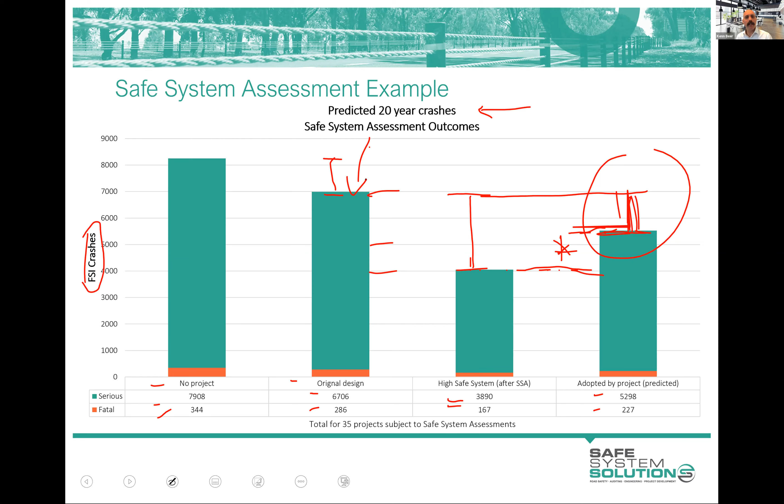I mean, the fact that these safe system assessments will feed back to the designers. So they will get a safe system assessment, they will review it, they'll update their design. The next design they do, they'll be like, oh yeah, that safe system assessment said that. Maybe I do that from the start. So I'm hoping we're going to see this coming down over time. So there are a couple of interesting ones. The other one I found fascinating was this one.

And we're doing a safe system assessment. We have an aspiration of zero deaths and serious injuries. Yet even after our safe system assessment, these ideas go forward, we've still got this massive residual crash problem, don't we? And this is interesting. I sort of questioned it a bit when I read this, or the report was tabled. I was like, oh.

But when you delve into it, the crash prediction models are pretty good in the sense that they take into account all of humans being human, and a lot of what we're seeing in this area down here are the motorcycles. So yeah, a fairly vulnerable road user going at high speed still. We see the extreme driver behaviours. We talked in module 1 about them not being the dominant cause of road trauma, but they're still a pretty significant part, and they're highly represented in this.

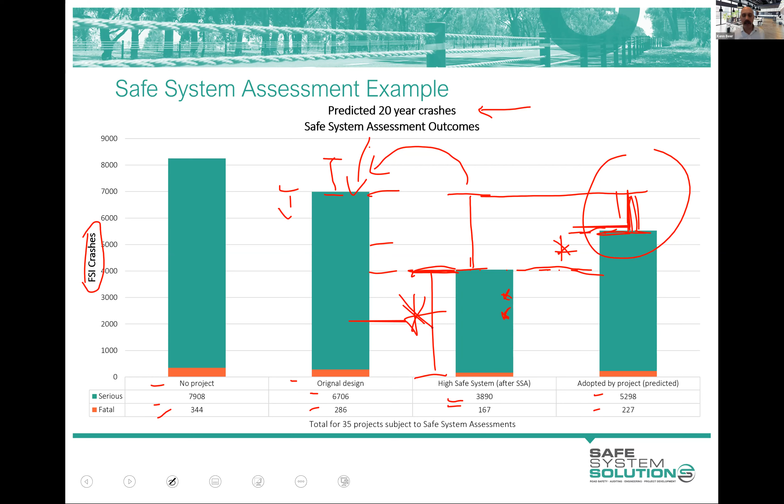What they're really saying is, things that align highly with safe system principles. But it just got us in these funny debates, and we had no way of measuring and making that commentary until the safe system assessment framework was tabled, and now you can quantify and score, and we can get some actual measurable decisions around that. Before that, it was just people's opinion on what was in their mind safe system or not, and I think that caused a lot of trouble.

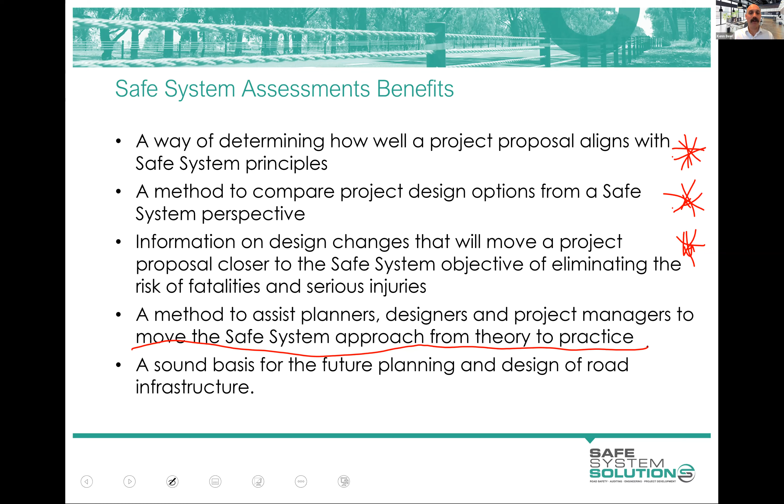Max, anything for me? Still kicking along quite well. Thank you, Kenn. Very good.

Very good. Let's talk through the process. This is the general process of a safe system assessment within an infrastructure project, okay? So the first thing to note is that the best time to do a safe system assessment is early in the project. The concepts, the planning, the drafts, the different ideas. Once there are detailed designs, even functional designs, it's actually better to do a road safety audit, in my experience.

Safe system assessment's okay, and it works well, but there is just more major change likely to be put forward in a safe system assessment than there is in a road safety audit. I mean, road safety auditors, and some of you are road safety auditors, you've done the course with me. We teach that you're not there to fundamentally question the project, the way they're doing something. You're there to just identify safety concerns associated with it. The safe system assessment is just more aligned with really questioning the intersection form, the operating speeds and these sort of things. There's overlap. I mean, audits do a bit of that.

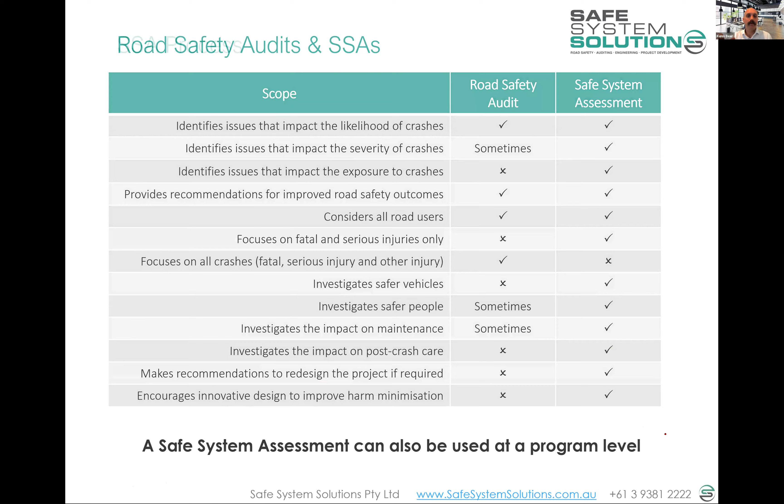So let's talk through the sort of steps that you'll be going through as safe system assessors, or if you're running a project and you're getting safe system assessments done. The first thing is that whoever's managing the project and the designer are going to decide, first of all, is a safe system assessment going to be part of our project? And if so, what sort of assessment is it going to be? Is it going to be a full safe system assessment, or is it going to be something more rapid? And I will define both of those terms for you shortly.

Okay, so the client, project manager, or somebody is making this decision. Often they're driven by what their state policies, their jurisdictional policies, or their local government policies tell them they have to do or don't have to do. But there's a decision made. And then they go and select a safe system assessment team. And hopefully they look to one of you, or they go to different registers that are starting to appear of safe system assessors. They make sure they know what they're doing, that they're qualified, they've done the course, and they then engage them to do the safe system assessment.

Then there's some sort of exchange of information, right? It could be a commencement meeting, it could be a variety of phone calls and emails, collecting the information that the team needs, and really drilling in and understanding the context of the project. We talked about movement and place and the like, getting an understanding of that. What are the projections on traffic volumes and pedestrian and cyclist numbers and all of that sort of information. So gathering lots of intel.

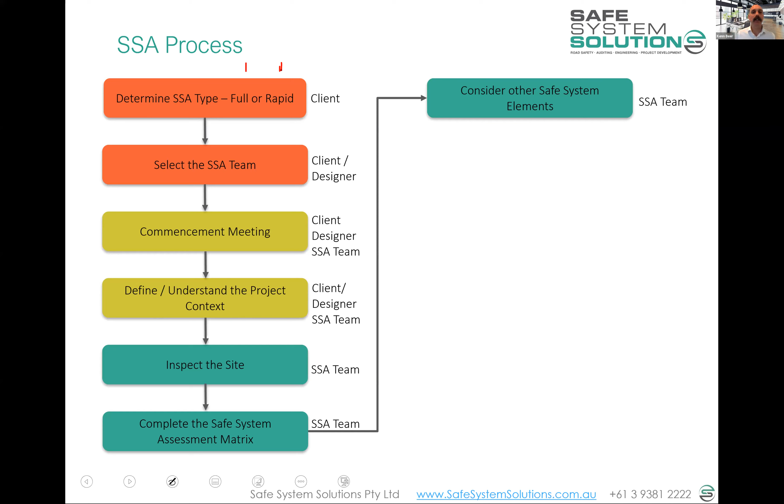Treatments to improve safe system alignment are then thought about. What can we do better in this project? What can be altered? What can be changed? And it's reported. And then it's sent off to the client, who gets it and then is going to respond to those ideas.

Not necessarily responding to the safe system assessment team, but they should, in their own project process, be saying, yep, we can do that one, we can do that one. We can't do that one because that would add $16 million to the project and we're over budget already. But instead of that, we'll do these other three. So they've got a nice, clean, documented process. And then they go and amend the design based on what they've agreed that they will do.

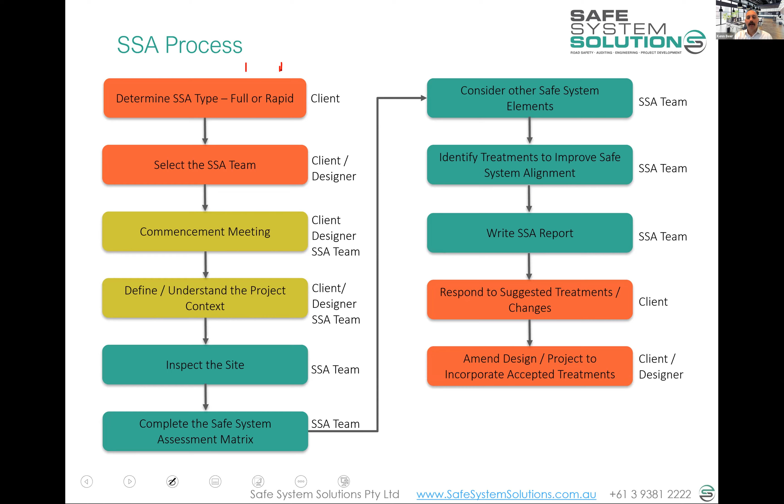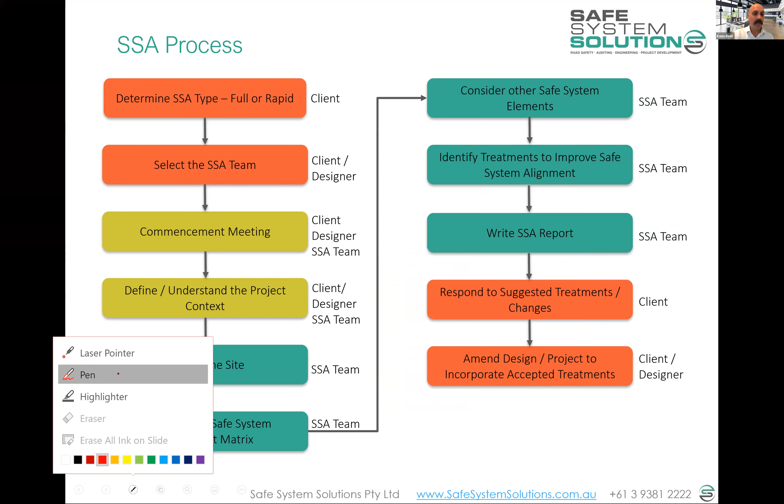And why do they do that? Well, what they're doing there is they are showing that they have followed this process, because maybe their existing conditions will be a score of 200, their design had a score of 180, and then they want to be able to add this next column, which says, well, we got a safe system assessment done and we've taken those on and it's brought the score down to 100 or something like that, right?

And that is wonderful documentation to leaders, corporate executives, project directors and everybody like that, that you've gone, hey, it wasn't bad, we were going to improve road safety, but we're committed to the safe system. We've all signed up to that, and we've done this assessment, and we've managed to bring it all the way down to here. We would love to see this go down to 0, but there's going to be challenges to get that. But it tells a story to anybody viewing it that you've done the best you can to progress this project forward with safe system alignment.

Max, questions? We did have one, which I'm happy for you to expand on, Ken, if you'd like. Just the reason there's a reluctance perhaps to get involved with SSAs, and I just mentioned that perhaps it's just not well known as a methodology in general, and practitioners aren't familiar with its application or when you should use it, or really what's the point of it, what's its output. So that's probably one aspect. Did you have any other things you could add in that space, Ken?

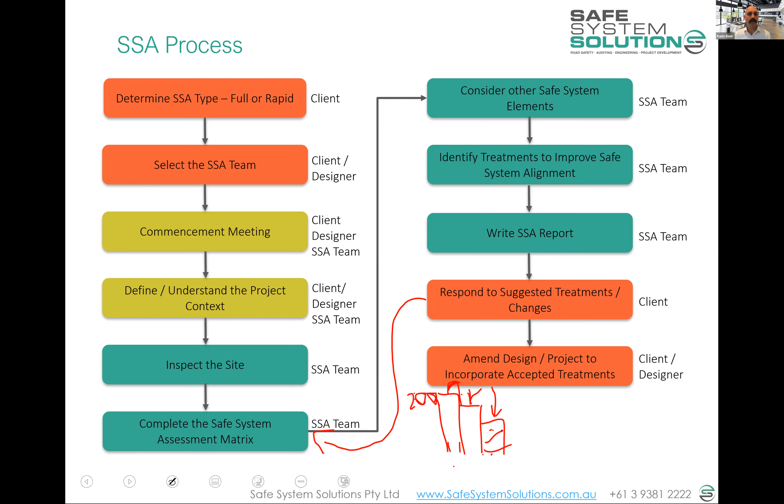Okay, I'll keep going. I'll show you a little bit of that stuff I was talking about with what jurisdictions are doing, and I'll start with Victoria here. Victoria was the earliest to adopt safe system assessment. Myself and a few colleagues did the first ever safe system assessment in 2013. Before that, we were calling them safe system audits, but we didn't want to confuse people with a road safety audit. Anyway, Victoria really took it on and had done a whole lot of things, and Austroads has then taken it on at a later stage. But Victoria has their own set of guidelines and lots of templates available. And you're now getting familiar with one of those templates, and you should use it.

Victoria is one of 2 jurisdictions to publish a register or a list of safe system assessors that they, I suppose, recommend. That's the word they've decided to use. They're dancing around different words like qualified or accredited or the like. They call them recommended safe system assessors. And this is here. They want to grow the list, an army of safe system assessors out there, but currently it's a smaller list. You contact the team. You can do that at any point. You do this course,

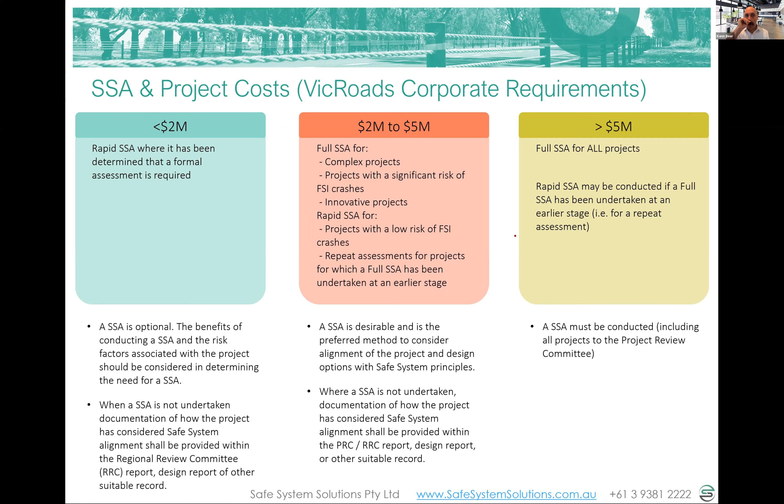So let's just very briefly look at the difference between this full and this rapid, or if you're in Queensland, you might hear the term lite instead of rapid. They're very similar processes. It's all pretty much the same except for a few elements. The full safe system assessment has a commencement meeting to get all the context of the project, as we talked about. There's this workshop. Now that's in there as optional, but that's one thing in a rapid that usually drops off. The site inspection can also drop off with the rapid sometimes. Now, I still encourage the site inspection even in a rapid, but it's one that can be dropped off. The matrix is done for the existing conditions and all the options in both.

The other elements of the safe system, those qualitative questions, that's another one that drops off with the rapid. So it's just solely down to the matrix and recommendations, changes to improve road safety. The reporting obviously is a little bit less for a rapid, and then the project considers it, makes changes, and amends it. So really, those are the four that could drop off in a rapid. So we're not talking about a lite being 10% of the effort. It's still about 75% of the effort anyway, but it's just a bit quicker to do.

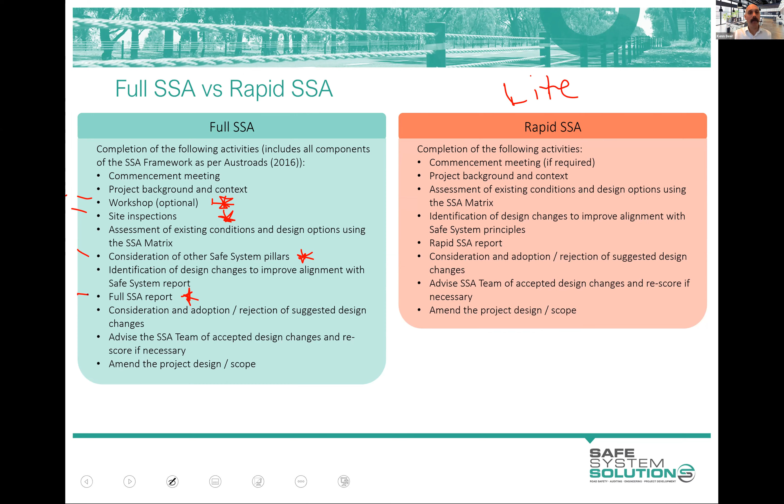And then what we're going to do to finalise and finish off today's session is to just run through a series of road environments, have a brief discussion about how well they align with safe system principles, what can be done to make them better align with safe system principles, and what you think about.

The reason we want to do that is that every individual in this group has one particular road environment that they're doing this safe system assessment on. It could be a local road environment, could be an arterial, but we want you to be able to do a safe system assessment on any part of the road network. And so when you go out of this, we want you to have at least had some thinking around a whole lot of different road stereotypes and road environments, just so you get a little feel for that. So anyway, that's what we'll do after we have a little break.

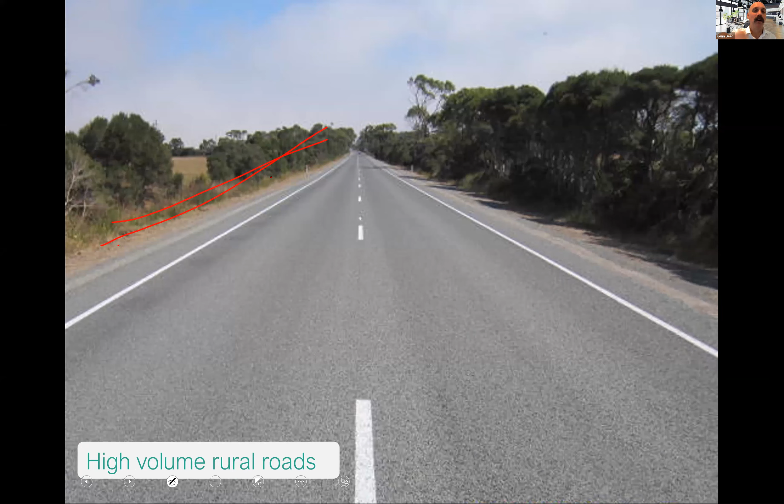Where you do get these higher order roads, and although this doesn't look like it's got high volume, it's higher volume, we really will then start to see continuous 2+1, 1+1 style barrier systems down the middle, barrier systems out there, and it'll be that bumper bowling of roads where we know people can leave their lane and be captured by a barrier system. There's significant cost involved in this, but it's creating those environments we know are safer, which will allow for the high speed traffic without having to trade off the lives and the health of our community in order for that to happen.

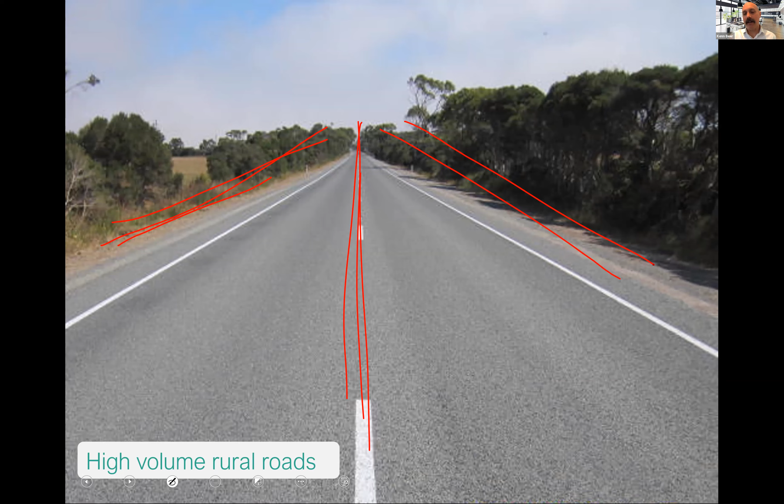The intersections on those sorts of roads provide wonderful opportunities then to get better safe system alignment, so a roundabout or something there. And if you do have your central barrier system, it provides you a good opportunity to collect access points and the like, so they can come down, turn around that, and go back that way, rather than having to have a gap in your barrier every few meters, which you can't do for minimum lengths of barrier systems and those sorts of things, of course. So

strategically thinking about how you run a route like that is good, and certainly we can share with you some reports that we've done on strategic rollout of safe system alignment in a sort of 20, 30, 50-year projection on a road, and where it's best to target different things in a coordinated strategic effort rather than just doing these little points of bits and pieces here and there.

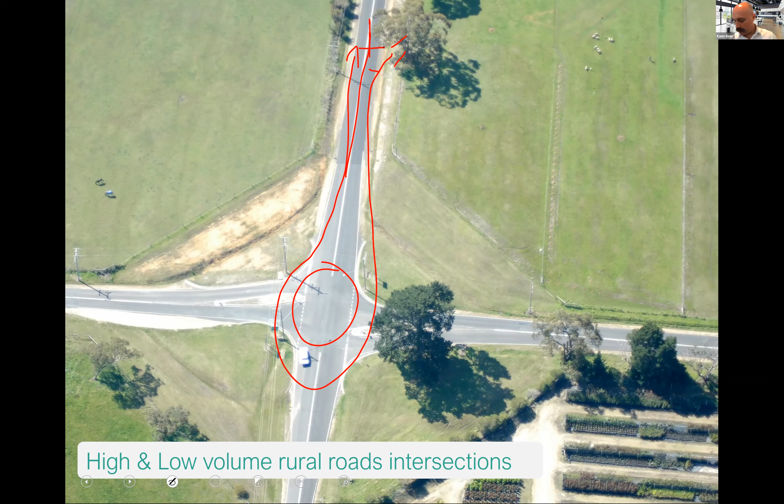How are we going on time? Okay.

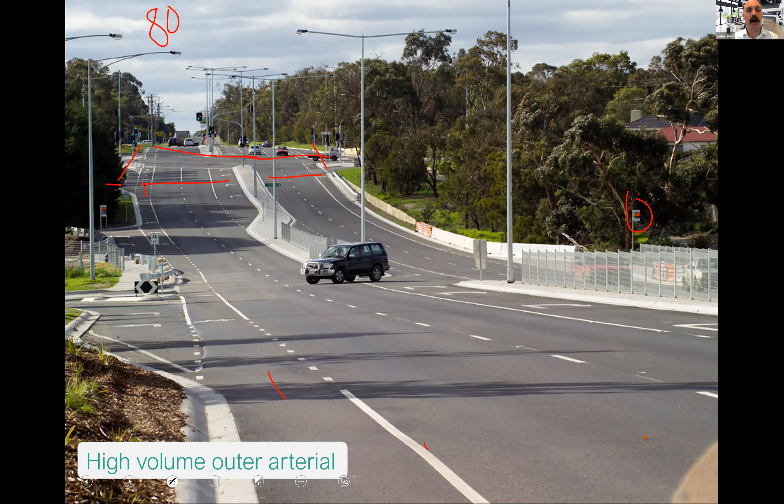And again, though, these are probably the environments where we recognise it's not trying to be a place. So things like the pedestrian fencing or real barriers, and maybe fencing off more and more to stop the pedestrians crossing through there, and specific crossing points. So those are the kind of things. It's not going to be a wonderfully beautiful road environment from a place perspective. Potentially there could be some beautification done of these areas in one way or another, with good thoughtful thinking around ensuring any landscaping and those sorts of things considers road safety. But if you're going down that track, it's really going to be almost an urban motorway, more and more of that feel.

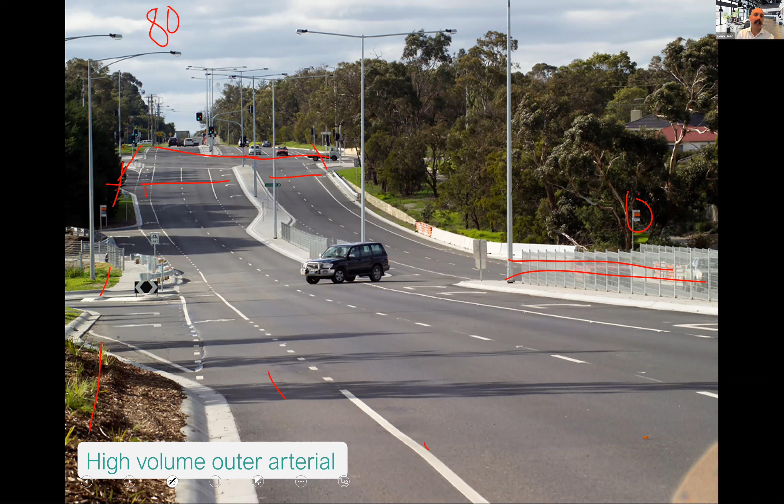And let's talk about urban motorways and the like, and their alignment with safe system principles. We see that actually these roads perform pretty well in terms of their safe system alignment, due to the fact that the likelihood is low because of the very high standard of roadway. The severity is quite low due to the fact that they've weeded out a lot of the bad safe system energy points, like any at-grade intersections. So we get that increased alignment there with acceleration lanes and conflict points at a low delta V.

Also, elimination of the exposure of vulnerable road users. So, usually banning of cyclists in a lot of jurisdictions, and pedestrians. We do, unfortunately, though, see a decent amount of pedestrian trauma on motorways and the like, due to broken down vehicles or people getting out of taxis at 2 in the morning, and wandering around on the road and those sorts of things.

So the real points for us to work through for higher safe system alignment, one of them is when the freeway starts to break down. Operating free flowing, it operates at really low likelihood of crashes. Operating fully saturated, like cars are banked up, not really moving too much, there's high likelihood of crash in that scenario, but the severity is extremely low because the speeds are very low. What we see is a very bad mix as the freeway breaks down in flow. We still see the high speed, but people are weaving, and then the crashes are happening at a higher speed.

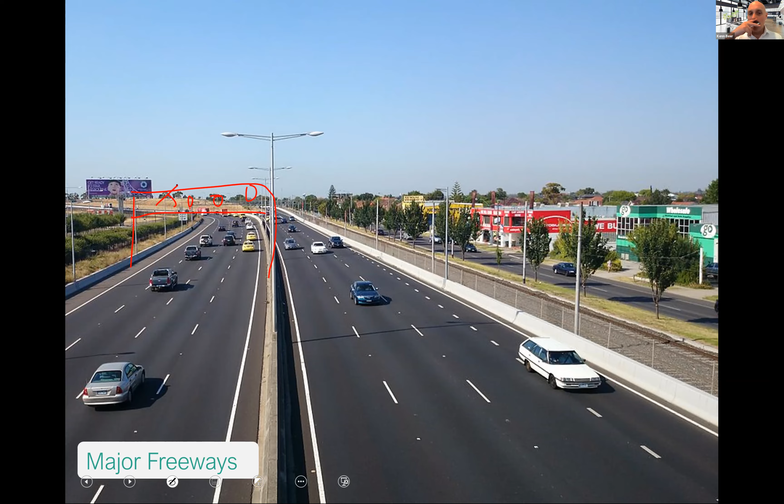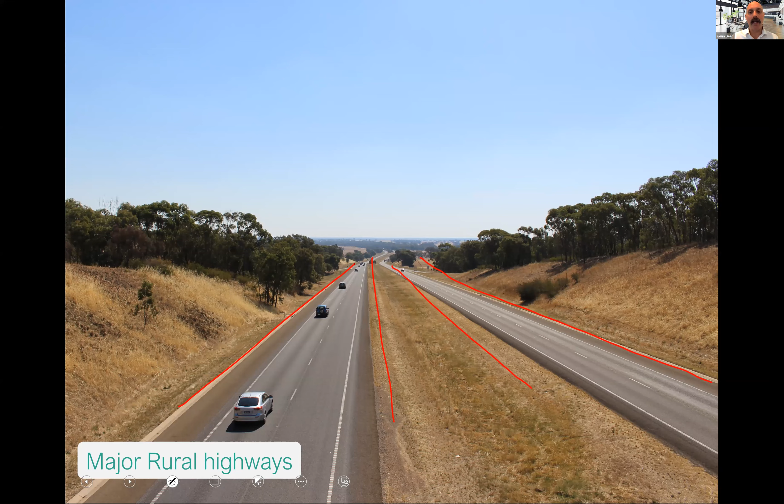And there are big rural highways, rural freeways. We've talked about this already in the second module quite a bit. Continuous barrier systems are definitely going to be our go on these sorts of roads until the cars are completely driving themselves and don't leave the road. And we've got more and more of those, but there's still a huge amount leaving the road. So continuous barrier systems, thinking about appropriate rest stops along the way and other features, and then grade separating our interchanges, of course, and where you can't grade separate, you want to close them off and direct them to other interchanges.

If that can't be done, really it becomes a point of trying to, I suppose, draw this, block off, provide good acceleration lanes for a vehicle and enough space for them, and then a turnaround point and another acceleration lane back with plenty of space for them to transition over. And that's kind of how you can still get good safe system alignment. So they would accelerate up, merge in, merge across, turn, accelerate up, merge in, merge across, and make their turn.

I mean, this is obviously much longer than I've drawn it on screen, but you need to bring the velocities up to comparable levels and move them around, because that move with that vehicle is way above what is tolerable. And you know, roundabouts on these would be great, except for a lot of these national highways there's high reluctance to put roundabouts due to slowing heavy vehicles down, slowing freight down, and those sorts of things. So this one can work quite well.